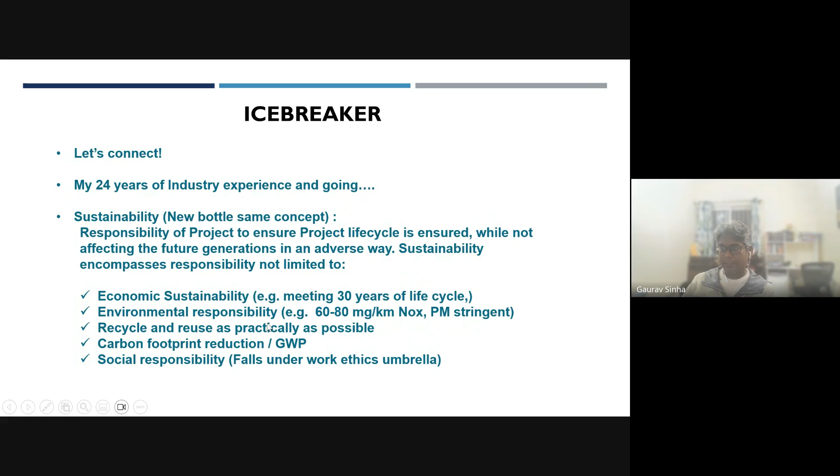Now, what is energy security? Energy security means having a primary energy supply from domestic and external sources, reliability of energy infrastructure, and the ability of energy providers to meet current and future demand. So what we want first is to secure the sources of energy.

Then energy equity - this means from the poorest to the richest person, everyone should be able to afford it. A country should be able to meet energy equity so that everyone can afford energy.

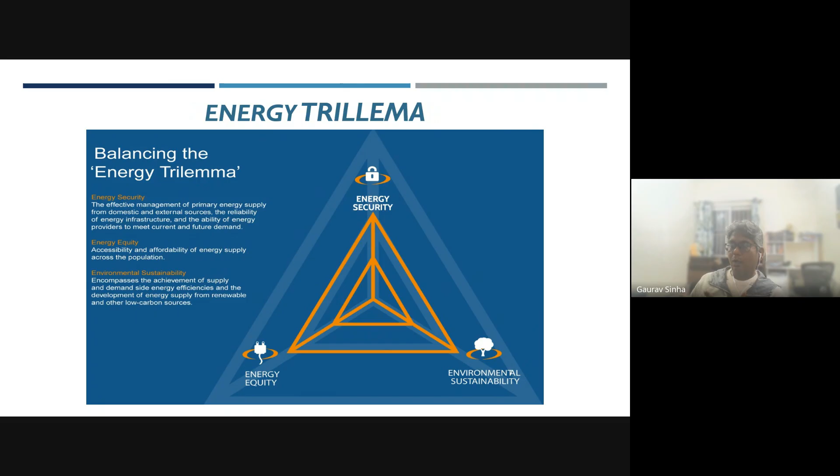Energy equity, again, this is where we are kind of struggling. Not everyone can afford it. A person who comes from an urban background and a relatively good economic background is able to afford air conditioning in his house. The other guy, even if he puts up an air conditioner on a continuous basis, the budget and the bill is going to kill him. I'm just giving an example. So it's not equity. Energy equity is still a long way to go.

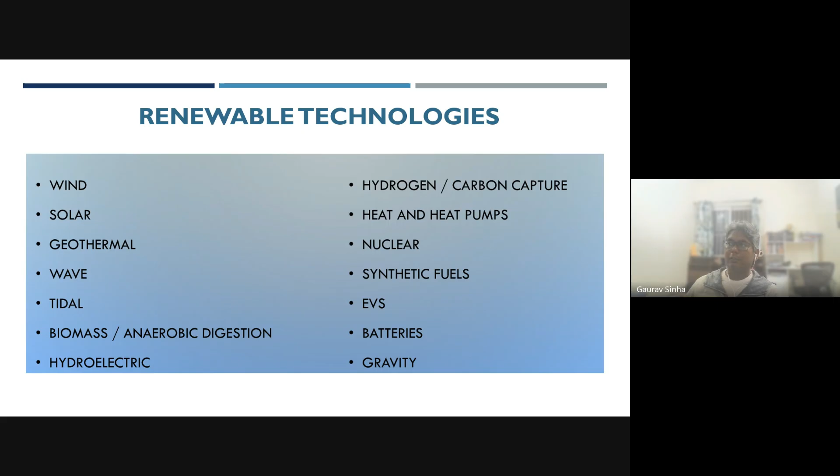EVs, yes, we are going for many electric vehicles. If you see today on the roads, we have Tata cars and other brands too. They always talk about green board cars, they are there. Hydrogen batteries, yes, there are certain projects in place. We are getting there, but it has a long way to go, and I'll come to the reason why. Hydrogen was a big thing, it still is a big thing, just that the technological breakthrough is ongoing. Gravity, I won't call this of much consequence.

Environmental concerns: now, whenever we talk about wind technology, we think it is excellent. But first of all, India does not have a sustainable wind farm kind of environment. Even if you go onshore or offshore, not everywhere can you get consistent wind. It is most sustainable in places across the world where wind technologies or wind farms have been in place, somewhere in Sweden and basically the northern side of Europe.

And then there are certain wind farms which have been made. The largest wind farms are in China, in a desert. Interestingly, the China one is not currently being used. They have made it, it's there, it's lying there, not currently used. It is capable of more than 3000 megawatts, but it is not being used because they're still on coal as of today, so they are technology ready. At one point, for example, in our televisions, there used to be something called HD ready or Android ready. So these countries are currently technologically ready, but since they have got a cheaper source of energy, this is still a long way to go.

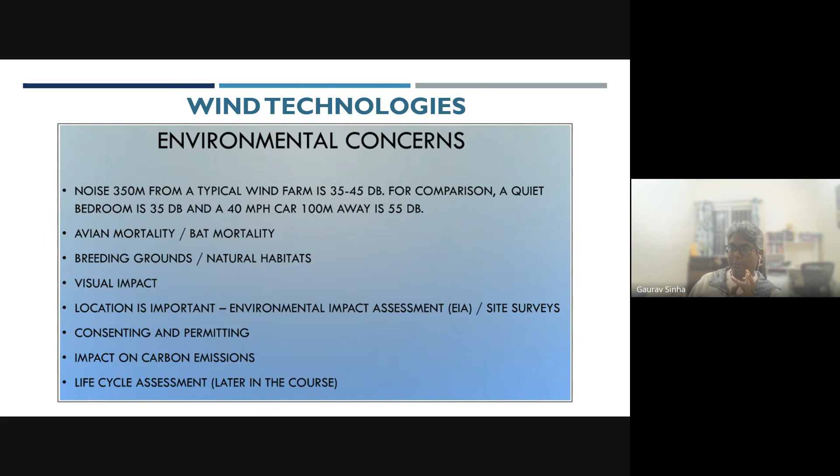Now, wind technology has certain other concerns. These terminologies are more taken on a universal level. So we have PETA, they have avian mortality, bat mortality. If the habitat of birds is there, the breeding grounds are affected. Visual impact is there too. I won't go into these points, I'll just go to the consenting and permitting. We need consenting and permitting issues, we have carbon emissions, we have life cycle assessment. So that is all, we have a lot to consider.

Shifting to renewables is not something I have been directly involved in the industry, but I'll try to touch upon this subject briefly. It's still important to discuss and compare with the oil and gas industry and what it is doing. So my subject will move from renewables to what we are doing today in the industry.

So hydrogen cells, wind, solar farms, water waves - these are some of the key renewable sources. Today in many small villages, the government is giving subsidies and incentives to go for solar lights and everything like that.

There are a lot of incentives by government for producing these. Wind is still a long way to go. Hydrogen cells, long way to go, but it's coming. Water and waves, we are lesser involved in that one.

Wind technology challenges: if the wind is to give a certain power, there is a minimum wind speed required. The typical threshold is something like 12 meters per second wind velocity, then we can think about generating a decent amount of power. If the same wind speed drops from 12 all the way to 7...

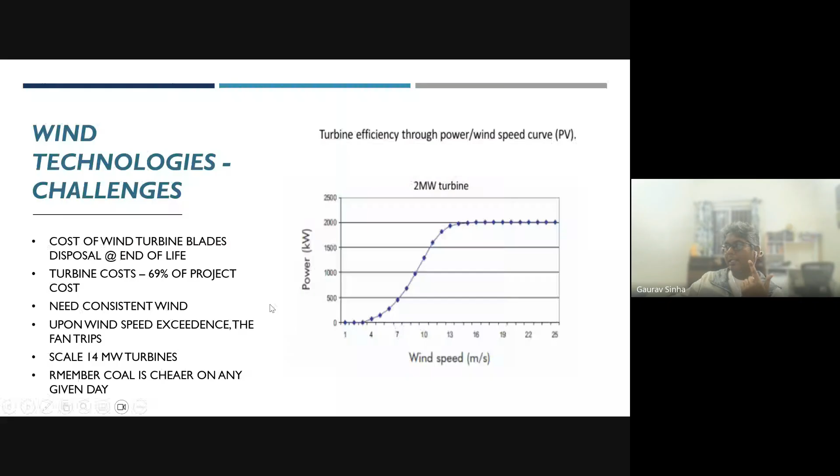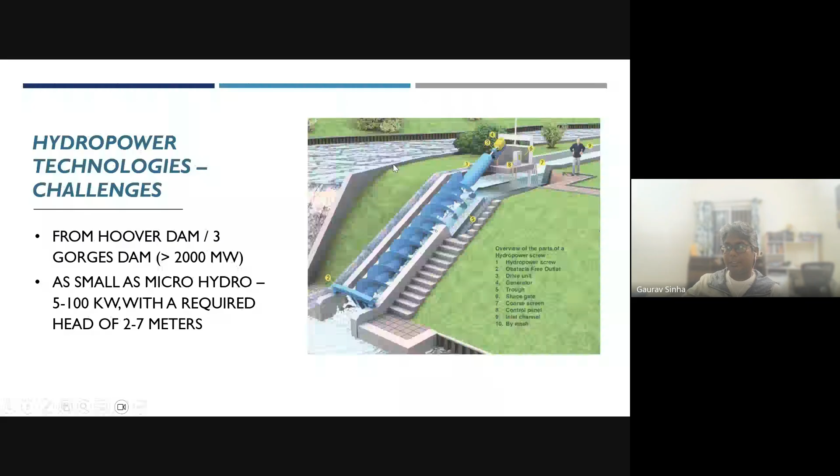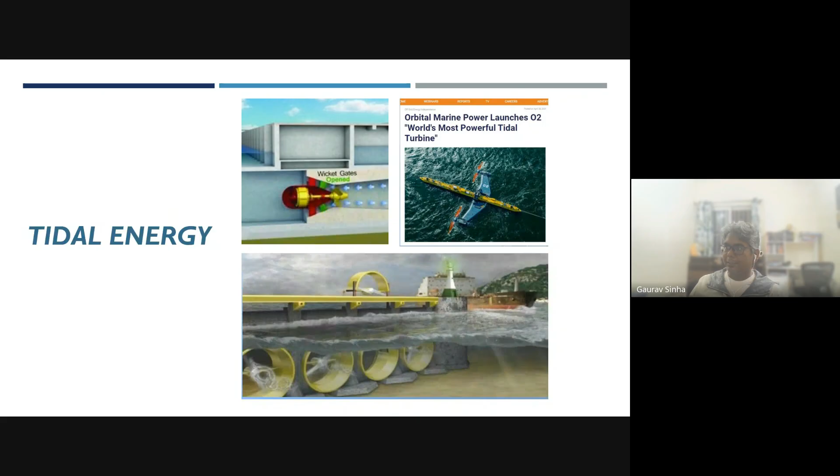See, even if the water source should be there, then you get this issue. So I wanted to mention hydropower technology as one option. Tidal energy is still there, mostly outside India - I'm not sure if it's happening in India, please let me know if you do. But it is happening elsewhere. Okay, I would like to mention one more thing.

In India, the concept is very interesting. We apply carbon taxes for compliance markets only. Compliance markets means those industries the government has already identified as pollution-causing. So they said that they either have to have an adjacent renewable industry, and the renewable gives them some carbon credits to offset the so-called carbon taxes. But even now it is very minimal as of today.

By 2030, that may go up. Again, it depends on how the government takes up these taxes, but it can go as high as $70 to $90 per ton for compliance markets - not every industry, just compliance markets. So carbon credits will continue. Carbon credits - you cannot necessarily only buy from your own company. If there is a third party renewable company, they can sell you carbon credits, and you can buy from that third party to offset these taxes. So this is going to be a very interesting scenario going forward in 2030.

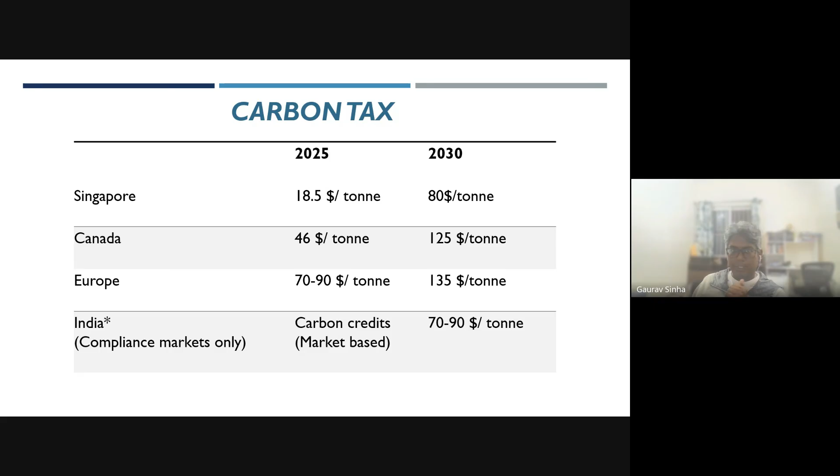I'll move from these somewhat boring topics, but I would like to emphasize this is still important for us. This terminology, global warming potential - I don't know if you see this word nowadays or not. Imagine if carbon dioxide causes an effect of making the earth warmer by 1 degree, we call this potential - the global warming potential of carbon dioxide is 1.

Compared to carbon dioxide, methane has 28 times more global warming potential. So if you are emitting 1 kg of carbon dioxide versus methane - I'll give you an example of where methane comes from. Methane may come from, for example, an LNG plant. In the LNG plant, one of the last units is called the nitrogen rejection unit, where they reject the nitrogen present in the final LNG product. There is a nitrogen recovery column, and from that column they send out the nitrogen.

But along with the nitrogen, 4% of methane is sent out directly to the atmosphere. So imagine that 4% of methane is as dangerous as 28 times the carbon dioxide global warming potential. I won't give you the exact definition, but you can imagine. So the carbon dioxide to methane ratio is 28. The only silver lining in this entire thing is that methane is not released as frequently, or as much, from vehicles and other places, as carbon dioxide is. So carbon dioxide is the single largest emitter by economy of scale. But then we have methane.

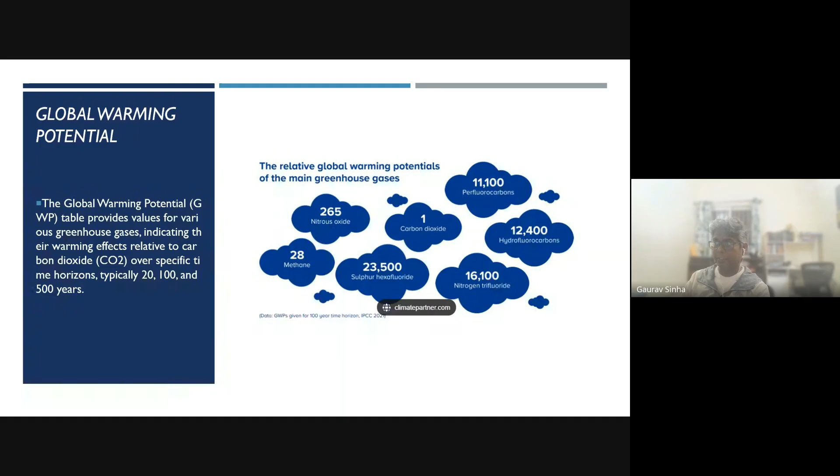Types of hydrogen - you have heard of green hydrogen, I'm sure. What is the definition of green hydrogen? Green hydrogen is developed from renewable energy. So imagine you're using hydroelectric power, which is a renewable source of energy, or even a wind farm, and using that power into the electrolyzer to produce hydrogen - then it is green hydrogen.

Gray hydrogen is something produced from natural gas or methane, using PSA, pressure swing adsorption technology - that is what we do in refineries today. From natural gas, we go through certain chemical reactions and create hydrogen using the reforming reaction, followed by PSA, pressure swing adsorption. That is called steam reforming. It's all about the source - the source is natural gas, and natural gas is supposed to come from fossil fuels. So that is why it is gray hydrogen.

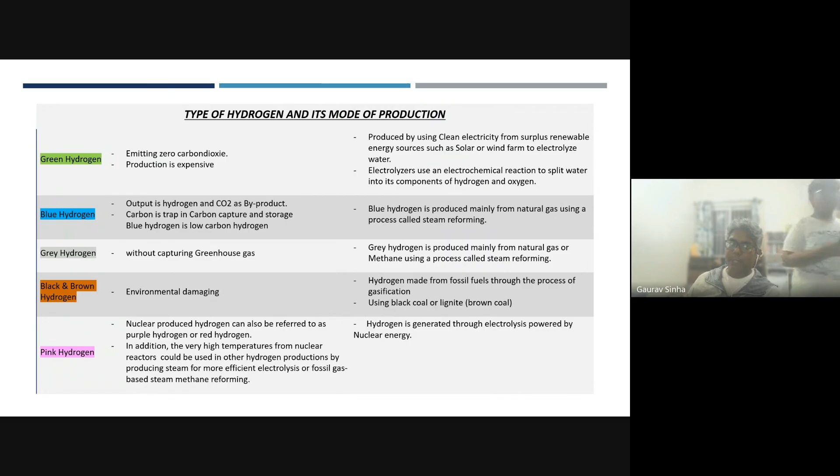Can anyone tell how diesel or biojet can come from a green source? Some of you must know jet A is very common, but in a sustainable way, for biodiesel and biojet, the main feedstock is plant oil and tallow oil. Plant oil is like vegetable oils, and tallow is coming from animal fats. These are the extracts we take directly from plants and oils, or even used cooking oil. That's why we say we are taking from greener sources and not from fossil fuels. Whatever technological change we make to make this source viable is what we call green - so green hydrogen, green diesel, green petrol as end products.

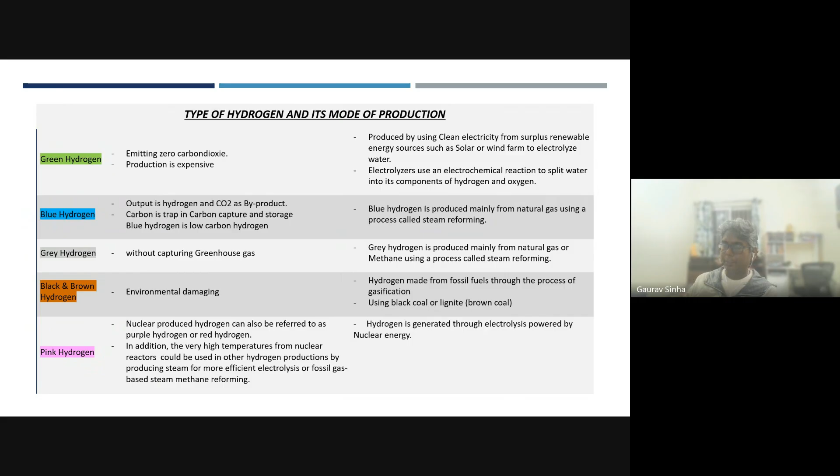I'll quickly move to hydrogen. The biggest problem today, why hydrogen vehicles are still in a concept stage, is because the problem with hydrogen is where do you store it. Compressed gas is a problem, compressed cryo is a problem, liquid hydrogen - how do you put it - or you use an adsorbent way, or interstitial hydrides, complex hydrides, or store it as chemical hydrogen along with ammonia. All these things are there, and sustainability is still halfway. Why halfway? Because if you produce hydrogen from PSA, conventionally from natural gas, the cost of hydrogen production could be as low as $2 per kg.

If you do the same thing with respect to the green sources, then the cost can be as high as $7 to $8 per kg USD. That makes it always economically unviable, and that's the issue.

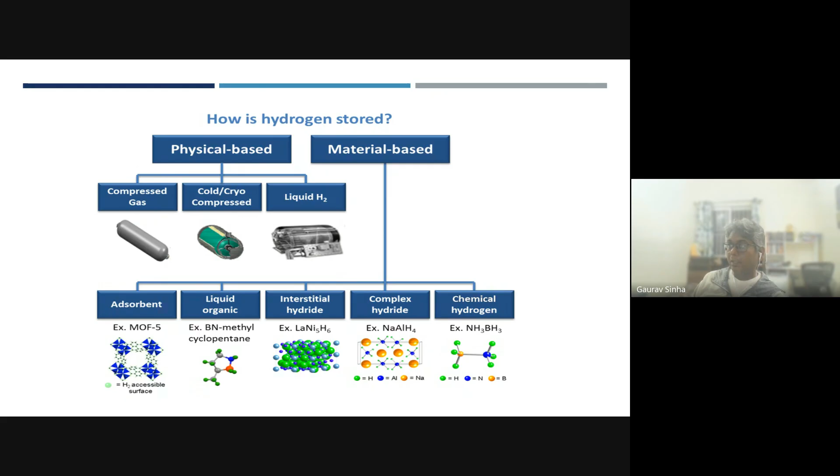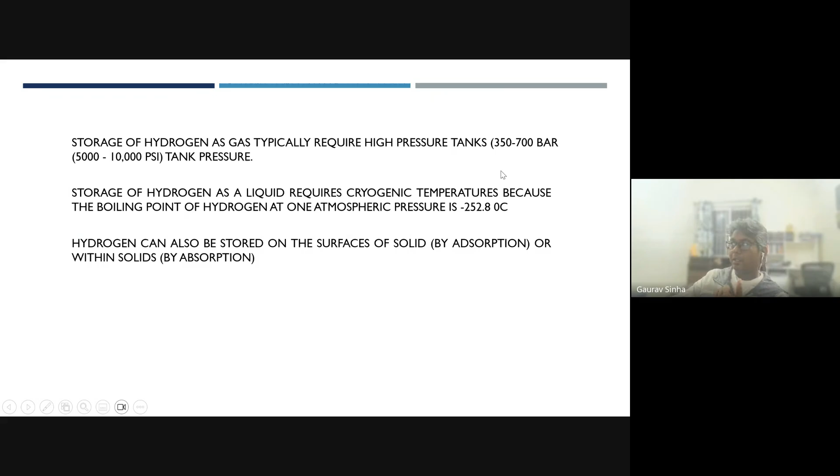Storage of hydrogen requires like 350 to 700 bar. It's a huge pressure. Just to give you a perspective, your tire is around 2.5 bar gauge. So against a tire, you are talking about 350 to 700 bars. Just imagine what kind of thickness the metal will be requiring.

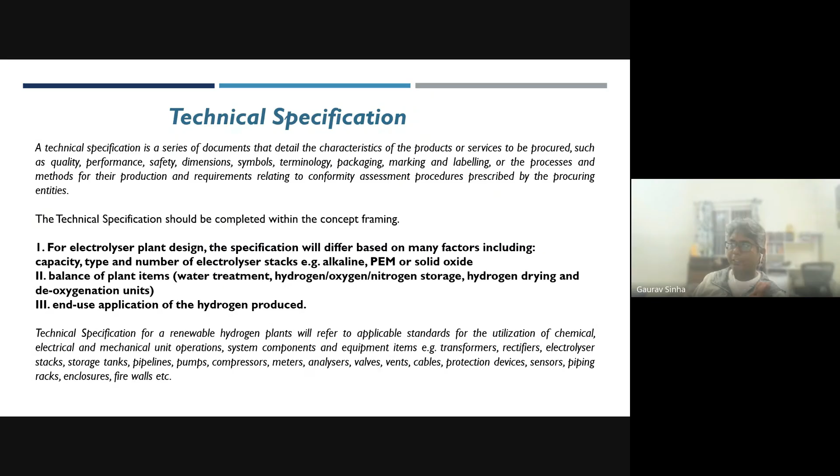I will skip this slide, and this is on hydrogen, basically what is the technical specification. We have to give the technical acceptance criteria required and what type of technology we are using, so we prepare those materials which are the input. Starting input is called a technical specification, whether you are going for alkaline, PEM, or solid oxide. This is true for any industry, we have to first come up with a technical specification.

Gate 2 is the FEED stage. That's the time when they give this information and pass it on to a contractor, a design company, and say give us a cost estimate which is plus minus 20%, for example. Once they come up with a more accurate estimate, they will come up with all the design details, get contracts from vendors, get quotes from vendors, get all the things they can get from vendors. But remember, there is no PO placement, no purchase order yet, no procurement, no buying. Until there, we are still checking the feasibility.

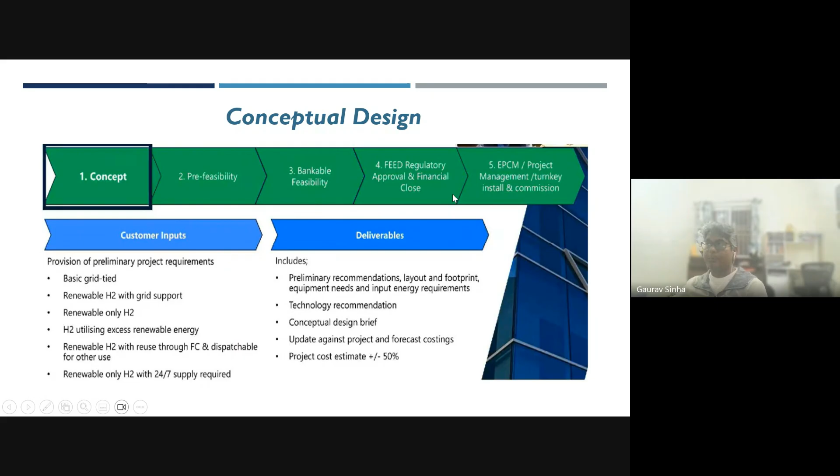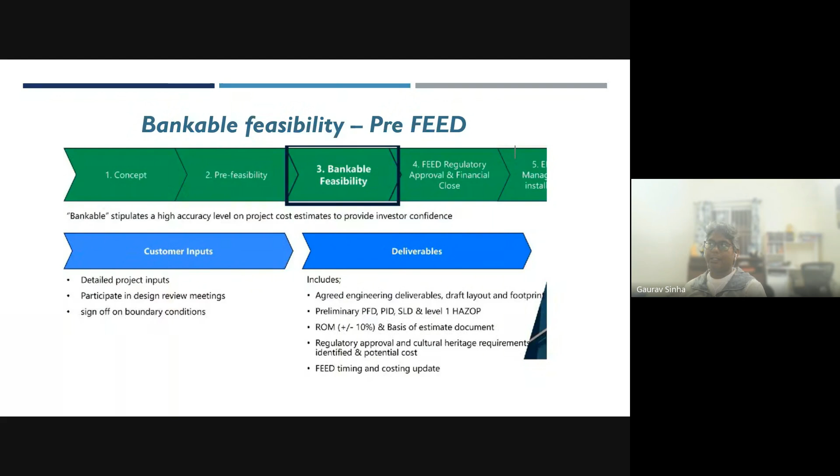Until this point, the second stage being the FEED or front end engineering design, if we have come across that it does not meet requirements, then it does not meet. Once we've gotten a cost as low as plus minus 10%, let's say, until the feed point, then this cost will be given to the client. The client will look at it: do I have the budget? Does it give me enough returns? And if he is happy with his assessment, then the client will say okay, let's go for the project. That's where the final stage, detail engineering, comes into the picture.

Detail engineering means they have given a go ahead, then we are talking where we have all the orders to the vendors for the big equipment, small equipment, piping, whatnot, and eventually it will all end up from detail engineering, meaning the detailed design, from design phase to install and commission. I believe many of you are aware of this process, but I just want to determine it clearly.

Basically, it's very easy to look from a non-industrial background and think we have a great technology, but why is it not getting approved? It's the business case which has to be met, and the business case is justified until stage 4. Until the business case is justified, many of the SAF plants by Shell or other companies, even Exxon, have shelved the project, have stopped the project because it did not justify a viable business case.

So while we always talk about having an energy transition, if the bigger companies say no, it is not making a business case, it will continue to fall back on the old fossil fuels, which is still cheaper. There is a lot of abundant oil and gas in the Gulf, in the US, in Russia, and still a lot to go. So that is why they will always continue to be cheaper.

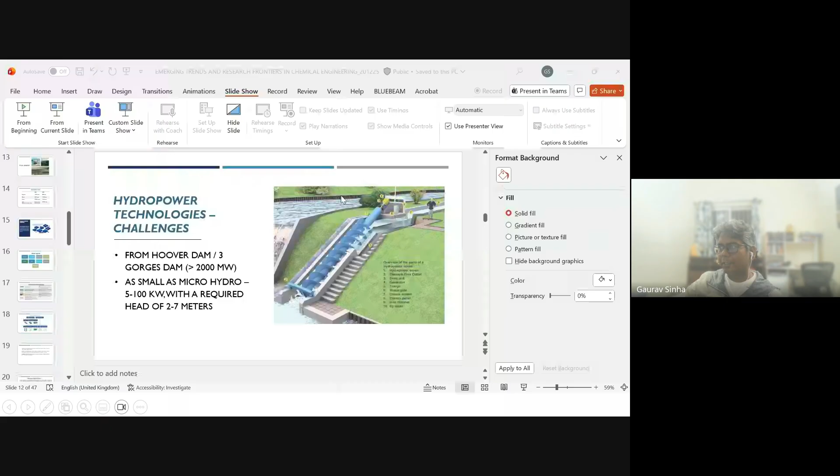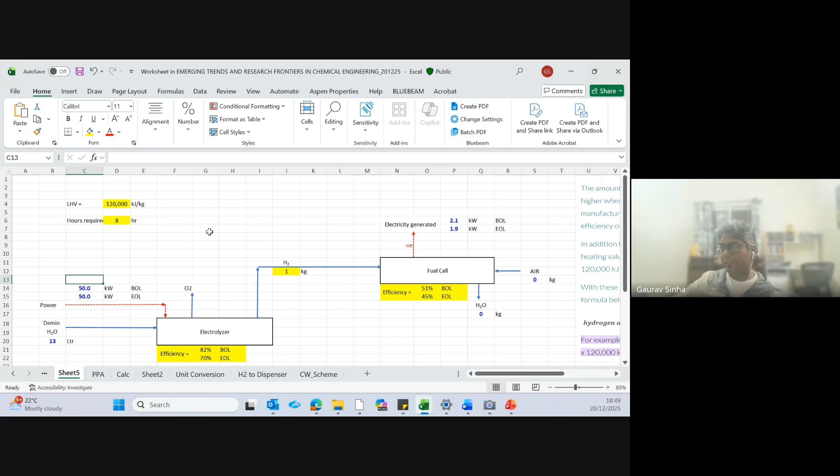We were saying that hydrogen is $2 per kg, that is the cost of making hydrogen. But that is not the end of it. We also want to see, to make 1 kg of hydrogen into the fuel cell, how much water is required. The water required is 13 liters, and how much power are we going to produce from 1 kg of hydrogen? We end up with a fuel cell battery of 2.1 kilowatts.

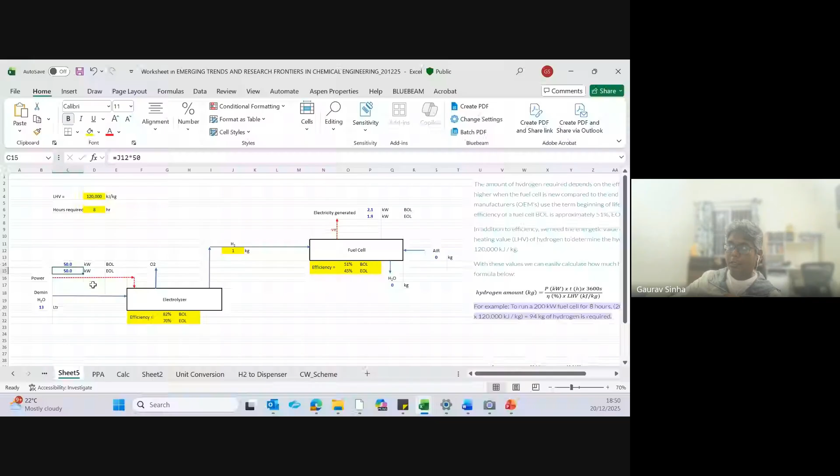But to get to 2.1 and to get this electrolyzer working, imagine we need 50 kilowatts of hydropower or renewable energy. So from 50 kilowatt, we are getting only 1.9 or 2.1 kilowatt of energy stored in the fuel cell. Somebody will say, why are we doing so much? Why not simply continue to use the renewable at 50 kilowatt and let the end user use the 50? Why put so much effort to get a hydrogen fuel cell which can only give me 2.1 kilowatt?

The answer lies in the fact that renewable sources cannot store energy. Even with a flywheel, you can only store it for 15 good minutes. The technology has not developed such that once you are generating on a continuous basis, you have to let go of it, you have to throw it away literally.

So instead of throwing that excess energy, the plan is that if you can have an electrolyzer, a PEM electrolyzer which can make hydrogen, and from there generate a fuel cell, the fuel cell is capable of 2.1 kilowatt. So from 50 kilowatt, you can only achieve 2.1 kilowatt. There is a lot of losses attached along the way, if you see.

Not only that, we need demin water as much as 13 liters for 1 kg corresponding to 2.1 kilowatt. So imagine if I want something like 100 kilowatts, which is 50 times this, I will need 50 times 13 liters in total. It's a very high consumption, so to speak, from a utility perspective.

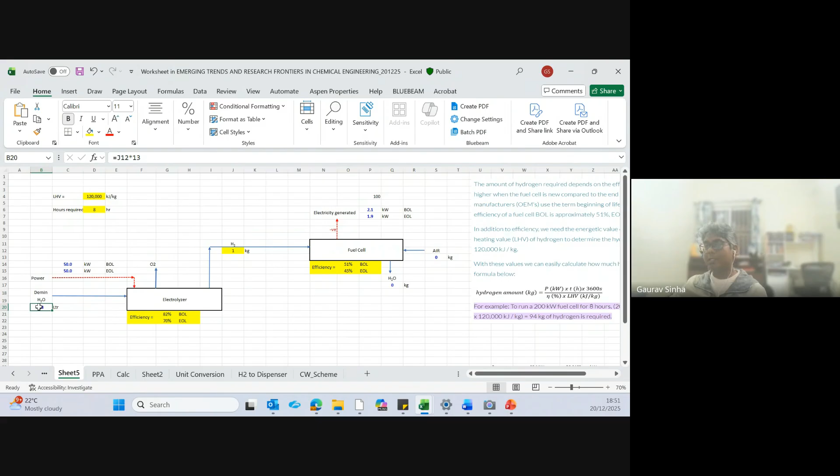There is a lot of utility required, and demin water does not come directly from groundwater. You have to have the demin package, convert the normal water, go through several stages of treatment, and eventually get the 13 liters. So there are a lot of losses involved and a lot of water involved, which is also as precious as this.

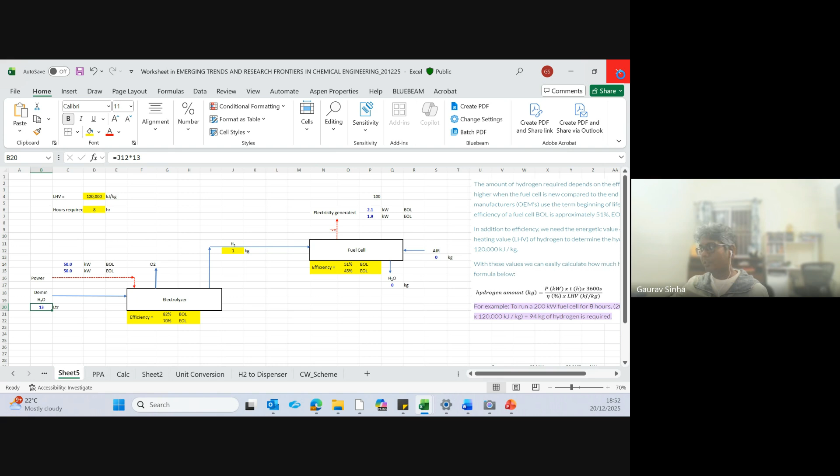So the idea of giving this was that even when we say hydrogen, there is a lot of issue with hydrogen. You cannot simply say I want hydrogen, I like hydrogen, so I'll make one. No, that does not happen.

I would like to touch upon something more closer to what we do on an industry basis. I would like to touch upon 3 topics. Topic number 1 is that everyone understands the fact that we have a lot of power plants, a lot of flare stacks today, continuously emitting gases which contribute to the greenhouse effect. So this is nothing but the carbon capture technology.

What it does is take the flue gas from a stack, via a blower send it to the so-called CCUS system. This is based on similar amine treatment units, where you have a contactor and a regenerator. The contactor comes with a solvent which is going cyclically, with very little solvent loss, just going in a recycle way.

So we are recycling the solvent, making the solvent richer. The solvent is a special solvent, either from Shell or Mitsubishi has got a solvent. The concept is the same.

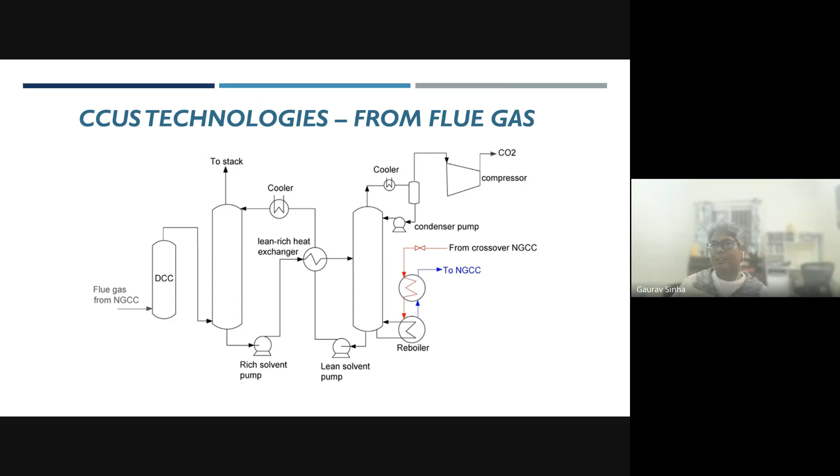So these are the CCUS technologies I was talking about: Shell Cansolv technology, Fluor Econamine technology, Carbon Clean. So all these are licensors, technologists involved today in essentially the same setup, just with their own solvents. Every solvent has some advantages, some disadvantages. Some can handle more SO2-laden flue gas, something can have more of one advantage over another. So they have their own advantages and disadvantages.

The key concept: solvent absorption followed by regeneration. CO2 can be further cooled by mechanical refrigeration and stored in cryo vessels. CO2 removal efficiency is said to be 90%, but I have seen more on the 80% side. Key selection criteria is minimum regeneration energy, which I said is the difficult thing. Advantages against certain contaminants: for example, Cansolv proprietary solvent is resistant to high SO2 concentration, thereby giving better removal of carbon dioxide. This is the second concept.

So just now what we discussed was that there is a flue gas and we remove 80% of CO2. Here's another interesting fact: what we do here is we want zero emissions across offshore platforms and other locations. We don't want even that 20% to be lost. So what do we do out here?

There is a flare gas that is supposed to burn up eventually in the flare stack, which will emit the CO2. Why flare gas? Normally there should not be gases which get flared, but during startup or during upset scenarios, a pressure relief valve pops up due to some emergency. There are situations when you cannot avoid sending some off-spec gas which you cannot utilize and sell, so you have to send it to the flare and burn it. So there is a burner up here.

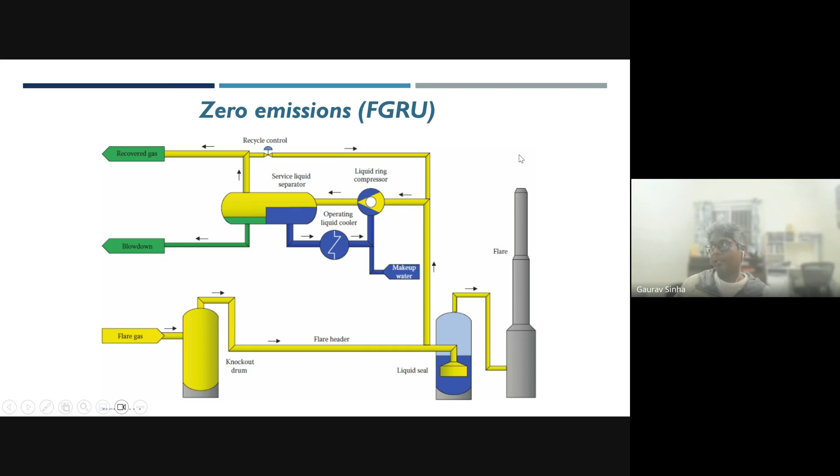Everything comes at a cost. All these compressors and other equipment do come at a cost. They come with indirect emissions, because to operate this compressor you still need energy. To operate certain coolers you still need water, and that water is coming from a cooling water system—that pump also needs energy. So where is that energy coming from? That energy is coming from fossil fuel. They are there, but not as bad as directly emitting into the atmosphere. So this is the FGRU concept.

So I actually wanted to touch upon FGRU, CCUS, and the third one is SAF and renewable diesel. This is something I spoke about a couple of minutes back. The idea is that if there is an existing refinery, what is the feedstock to any refinery? It is crude oil.

Now, with today's economics, crude oil is getting less and less—sorry, many of the refineries are closing down, they're mothballed. So instead of using crude oil, we can actually use palm oil. We can have a pre-treatment unit, because unlike crude oil, palm oil and tallow cannot be straight away used. They have to go through something called HCO, or hydro cleaning system, or a pre-treatment unit, to take care of gummy substances and remove heavy metals which are there. They remove all those things to be able to send it to the actual processing unit, which is HEFA.

HEFA is nothing but hydroprocessed esters and fatty acids unit. It is similar to hydrotreater units, hydro desulfurization units, and hydro isomerization units. Basically, by doing this, with all the separations like a refinery, similar kind of fuels and utilities, we eventually get renewable diesel, sustainable aviation fuel, and naphtha as the final products.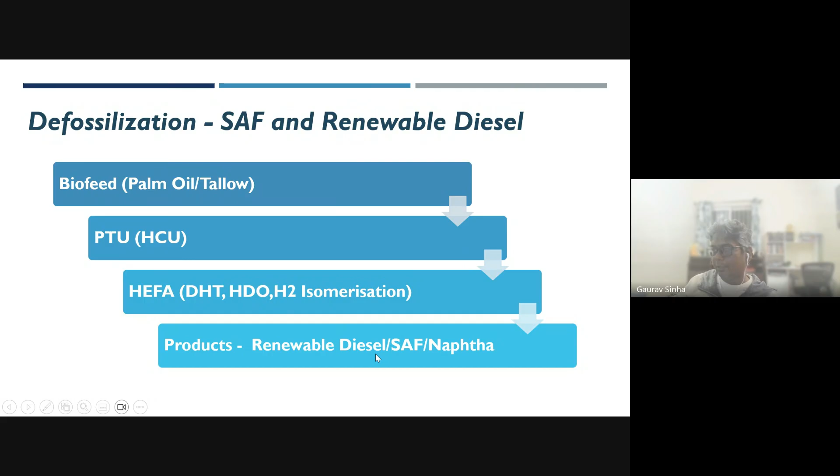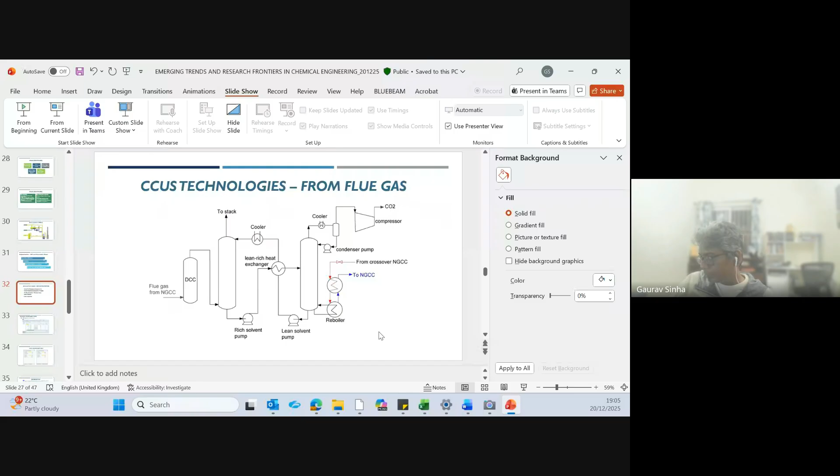Okay, I'll come quickly to something called simulation, for which I was also given as a topic. I wanted to come to the simulation topic again, going for a time check. Okay, still good.

So simulation, right? I'm sure many of the younger engineers and the younger generation have used this concept, simulation. You may have HYSYS in your college curriculum, and many people might be better than me at it. But the thing is, what is the use of simulation? What do we do in simulation in the process industry? How is it important to us?

So simulation, what it does is it has got certain fluid packages which can help you determine the properties, generate properties, and simulate whatever you have put in the technology. Whatever plant you're putting up, it can simulate the entire plant as if it will be working, as designed, it is supposed to work.

It will kind of simulate that, and you can validate it if there is an existing plant model, an actual running plant, you can model the same, be it chemical reaction, be it anything. So basically you can simulate it, optimize the plant, validate the plant, and debottleneck the plant with this.

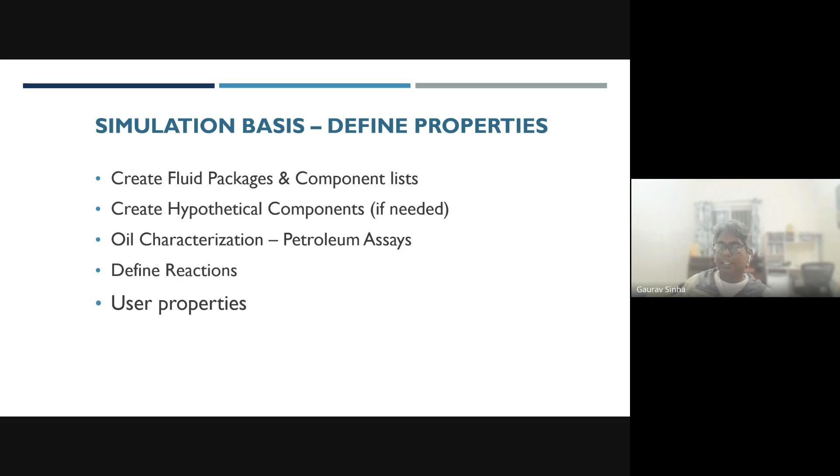And if there are any reactions, we can define reactions. If we want to generate user properties like density, viscosity, vapor pressure, thermal conductivity, specific heat, or any other data needed on a day-to-day basis, these properties can be well generated. So this is typically for HYSYS.

This is not the only software we use, it's pretty common, so I'm just sharing this. But PetroSim is also very similar, Pro/II is also very similar. So we come up with components, we have methane, ethane, isobutane, and so on. We add the components, then we define...

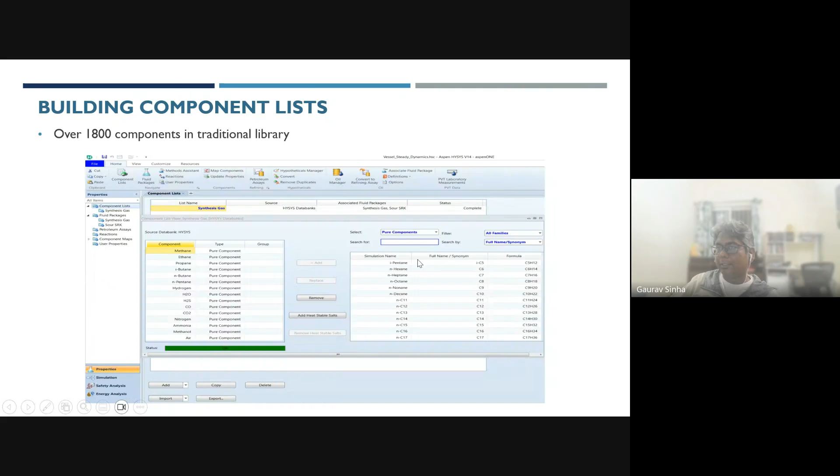So then we define the hypo components. Hypo components are sometimes what the client gives, not everything comes as a proper composition. So they call it hypo, like pseudo components. Pseudo components are like if somebody has already modeled it previously in HYSYS or something, then the properties we have from that previous model, we only get the molecular weight and normal boiling point, and then we allow it to back-estimate the hypo, or the pseudo, or whatever you can call it.

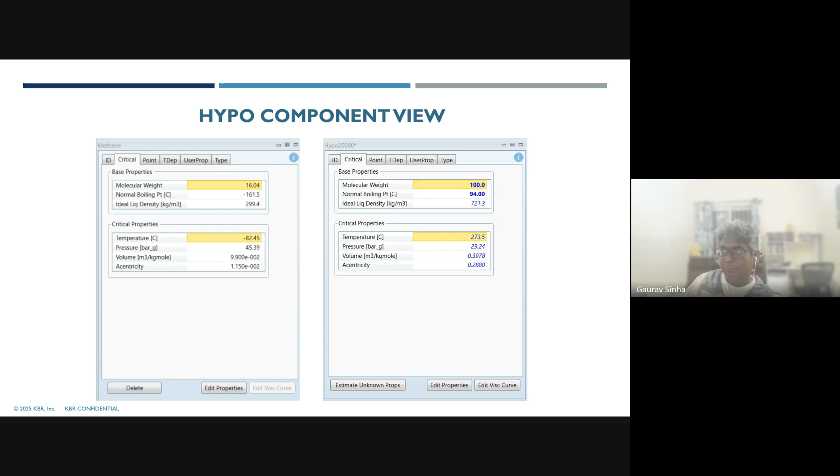So we have a list which comprises of lighters, actual components, hypo, and the TBP. We can use in any combination, whatever is available with us. If we have got lighters, then only lighters. If you have got all the actual components, then actual components. If we have got all the hypo, you can also use purely based on hypo. Or you have got the crude assay, then you can put in the crude assay and the software will generate the properties, or a combination of three. You can also put in the input or feedstock conditions. So once we have given all that, you see there are a lot of property packages.

For example, PR is pretty common. If there is hydrogen, there is a hydrogen package. If there is SRK, then there is an SRK package for certain kinds of components. Lee-Kesler, then there are certain which use Antoine's constants, more applicable for some electrolytes. So there are various packages which can be used, and there is a guideline on which package to use.

For hydrocarbons, like I said, we typically use PR. Then if it's sour service with more H2S, we use SRK. So then we can also put in the reactions.

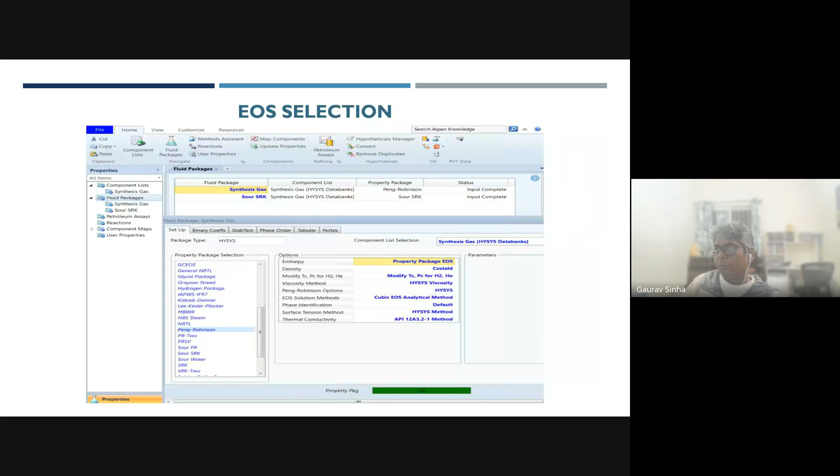Reactions with the stoichiometric coefficients can all be well defined here. We can have conversion, equilibrium, heterogeneous, catalytic, kinetic, simple rate. I know I might be going a bit fast, but these are all the facilities available - nothing great. What I'm saying, you don't need to know now; when you learn, you will learn. But what I'm trying to say is that we have a component, we have the equation of state to be selected, then we have all the facility - reactor, line sizing, exchanger, you name it, it's there.

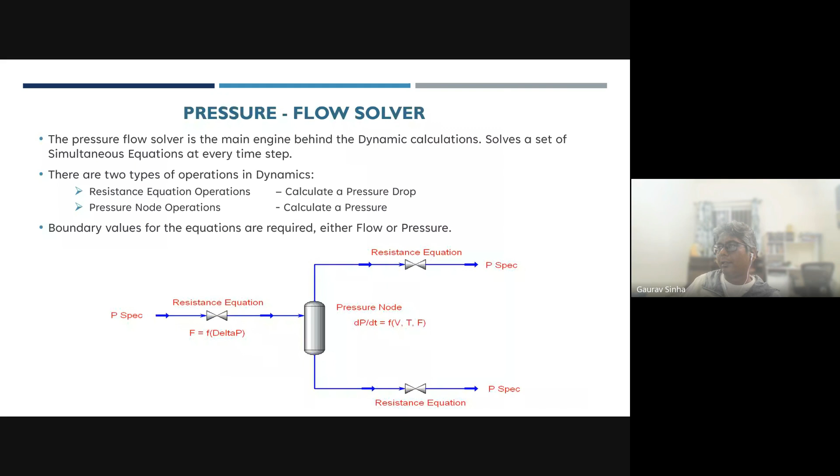So I will kind of skip the dynamic simulation, but I'll try to make it simple - what can simulation do for us in oil and gas? If nothing else, simulation can help in line sizing, whether a 2-inch or 3-inch line size is required. But line sizing can also be done using an Excel spreadsheet or flow assurance data.

Then there is control valve sizing - if there is a control valve in the line, again Excel can do it. Separator 3-phase sizing, yes, Excel can do it. Distillation column - this can also be done separately using Excel, or with proprietary distillation column software.

Either spreadsheets or by the simulation. What does it do for us? You can include a control valve, put a PID controller - all three things can be put here. If there's a line sizing, you can put the pumps, there's a pipe, then a separator, then distillation column, followed by heat exchanger including reboiler, reflux - everything can be there, and there are a lot of functionalities inside that.

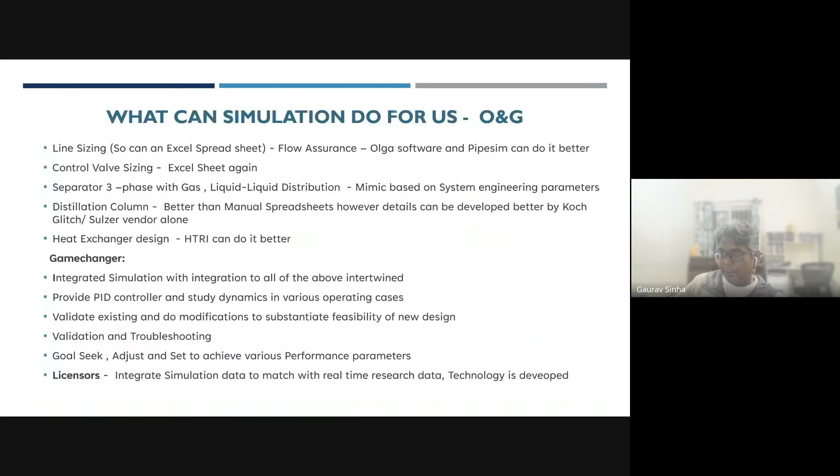But if you go to the next slide, what went wrong is a pump should operate only on liquid phase. If you see here in the first slide, the vapor fraction was 0.8227, meaning you cannot force vapor through a pump in real life. Simulation will agree to it, and it will give you a warning, but you have to be intelligent enough to know the warning. So there was something wrong.

You should not have had a liquid at 30 degrees C. In fact, if you see what all was wrong, the source was having a vapor fraction of 0.8227. Across a pump, there is not supposed to be much temperature increase, but what happened is the temperature shot up from 30 degrees to 139. It's not possible for a temperature to shoot up from 30 to 139 like that.

You know what actually happened in this case? When we developed this, we thought everything is going great. We put up some numbers, and eventually it started considering it as a gas. And gas, if you compress from 1.5 bar to 11.50 bar, it will compress, and based on the efficiency of that compressor, it will increase the temperature to very high numbers. So instead of a pump, it ended up behaving like a compressor. The whole thing is incorrect.

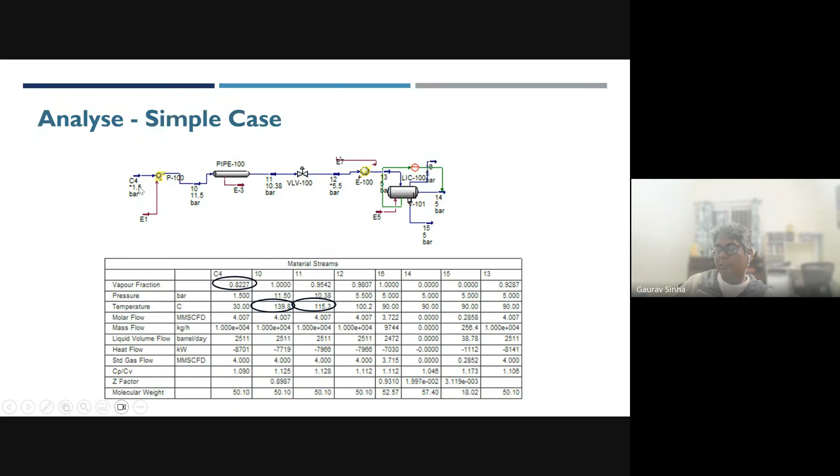So to do it correctly, what we needed to do is realize that the pressure we had specified was below the vapor pressure of butane liquid. Butane has a vapor pressure of 2.86. So what I did is increase the source pressure to 2.87, which is more representative and correct. So you see the vapor fraction is 0, and everything is converging nicely, and we are getting a separation of butane and water.

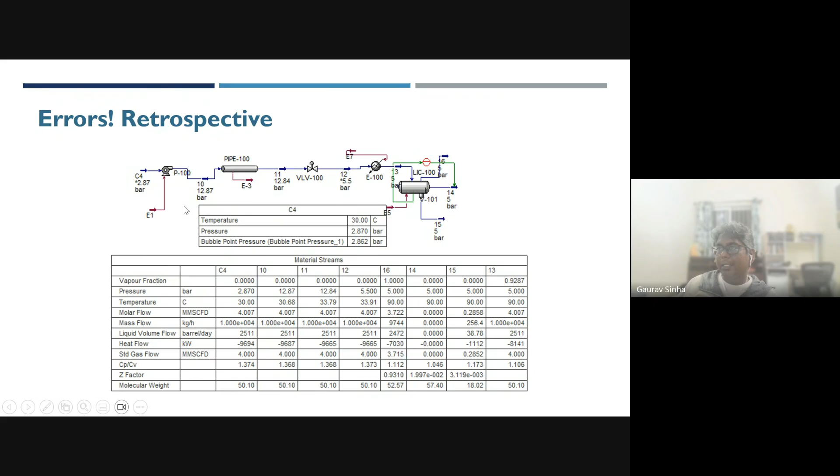And in stream number 13, because the exchanger is increasing the temperature from stream 12 to 13 — if you see stream 12, the temperature is 33, and in 13 it's 90 — because of that, whatever vapor was there changed. Stream 12 was an inlet, a liquid. Stream 13 became two phase, meaning more vapor, very less liquid, and of this, the vapor was eventually separated, liquid was separated, water was separated. So this way we have to be intelligent enough to understand these things.

There are a lot of other things simulation can do. It can do cost estimation, optimization, operator training simulation, digital twin, Aspen Unified PIMS, which is production planning software. This means you can define that if the price of petrol is going lower and you want to convert your refinery to produce more petrochemicals or naphtha, this PIMS software helps you plan the production and distribute the streams in a way that gives you the maximum commercial benefit. So there are no limits, and with AI in the picture, this is even going to be a game changer.

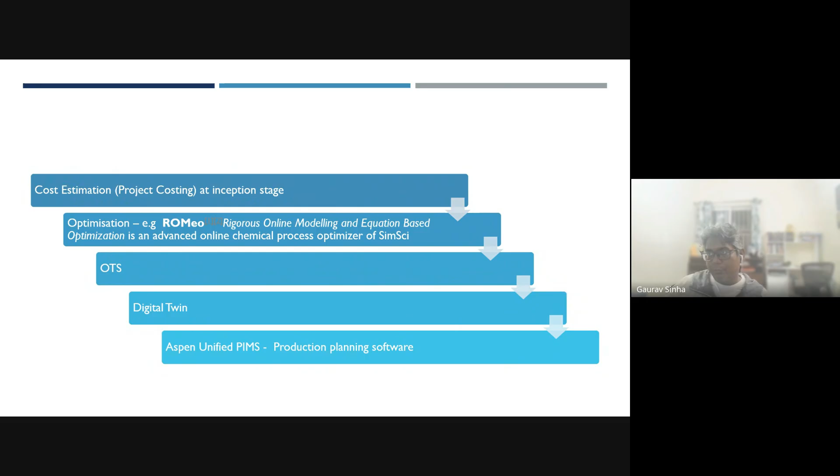So I will stop here. I had kept something for reserve slides, but that is not required for now.

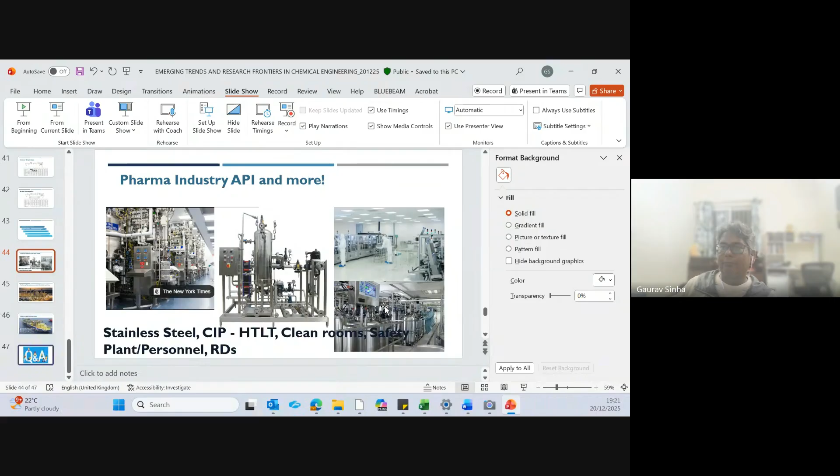But what is special about an FPSO, or what is different about an FPSO from a refinery? The biggest difference is that the FPSO, a ship which is taking oil from all the wells, sits at a single location. For the next 15 years it will be sitting in a single location, it will never ever move. It just takes from the wells, processes it, and passes the oil to the nearest tanker. The tanker will come every 15 days, take it away, and that will go to the shore, to a refinery like Jamnagar refinery, and so on.

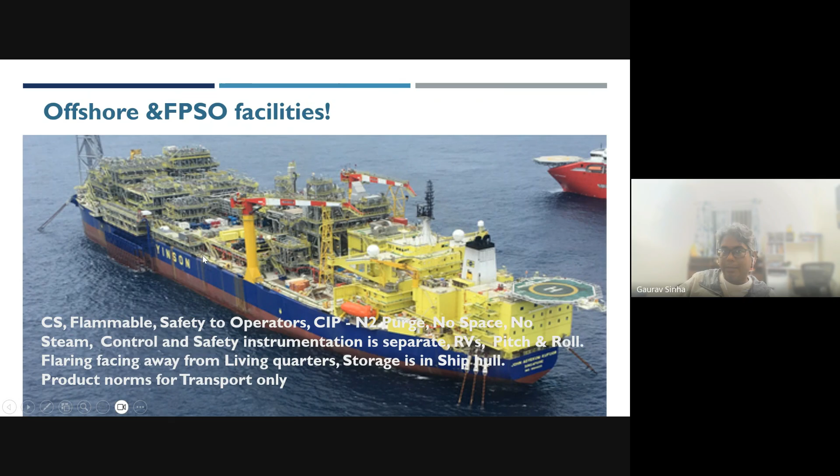How people stay in the FPSOs, how they operate, how they do their day-to-day work is pretty interesting. I would compare offshore straight away with a pharmaceutical plant. What difference do you see in a pharmaceutical plant? Everything is stainless steel, everything is very shiny, meaning it cannot afford to contaminate.

Tomorrow you are going to eat a medicine, paracetamol. Do you want it contaminated? It has to be extremely clean. The air has to be clean, people have to be clean. The system has to be designed for good CIP, cleaning in place. HTLT means high temperature, low time. So after every use, after every batch, it has to be cleaned with steam and with ultra pure water, not just normal water, not just RO water, ultra pure water. So steam is not just any steam, it is ultra pure steam, or clean steam.

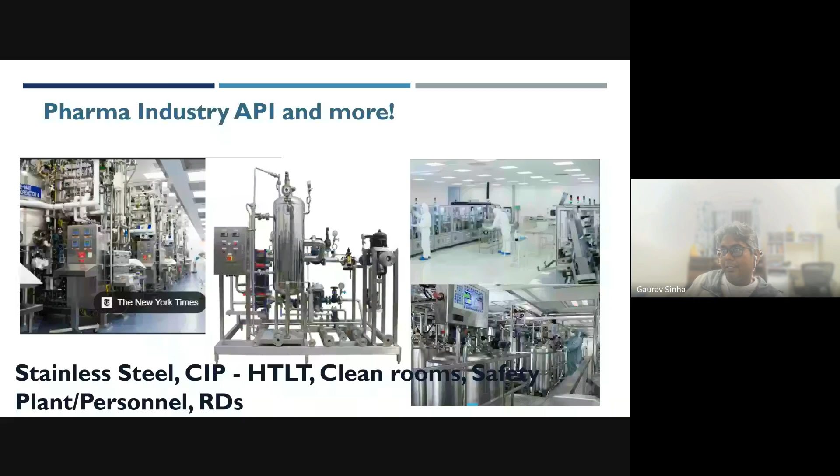Clean rooms, safety personnel, and the air - we don't want external air, so the rooms are slightly pressurized. The air in the room is at slight pressure, so if anything happens, it goes from inside to outside. Nothing comes in, dirt will not come into the system. These are things very much prevalent in our industry. And refineries, as you all know, lie in between those two.

So basically a refinery has a lot of space. Flammability is a problem, so people handling flammable gases and H2S-laden gases have to wear a lot of PPE, personal protective equipment, sometimes masks, sometimes other things. It's a safety concern for somebody to work in, but at the same time they have to deliver, they have to meet production goals. So they have to have enough control and safety instrumentation in place to make sure all this works.

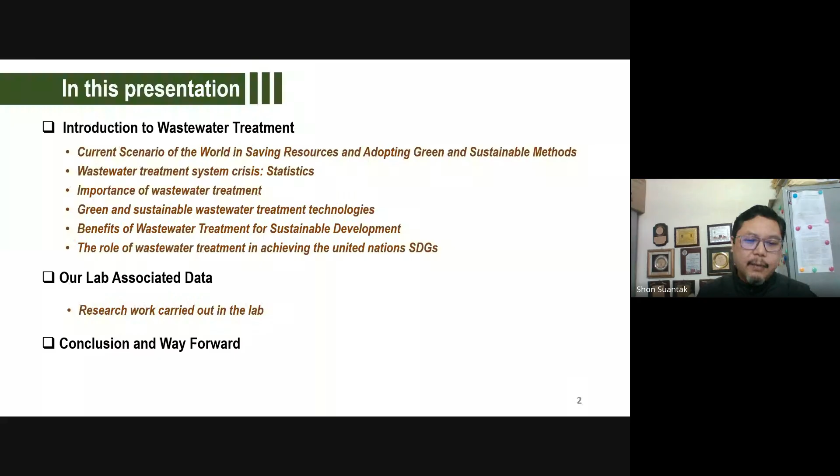For sustainable development, we can also talk about SDG - Sustainable Development Goals - and what those goals are. Then we're going to move on to our lab and what kind of research we are doing this year at MNNIT - that's what we're going to talk about.

First thing first, many of you know that wastewater can be categorized as domestic, industrial, agriculture, and stormwater. The basic thing is that this wastewater could be started from our household. If we can treat and maintain the waste from our households, we can save so much and give a positive impact to the environment.

This is what I was pondering - rather than using different technologies and investing so much money, why can't we concentrate on our households? Then we could save lots of money as well as lots of resources.

When we talk about waste, it is more about the contaminants - the pollutants that are in the water. So how to remove these things is very, very crucial.

We have a traditional approach and a modern approach. In the traditional approach, earlier what happened is we mostly focused on purification before discharge into surface water - in industry, effluent treatment, we concentrated on that, and on public health, so it should not have an impact on the environment.

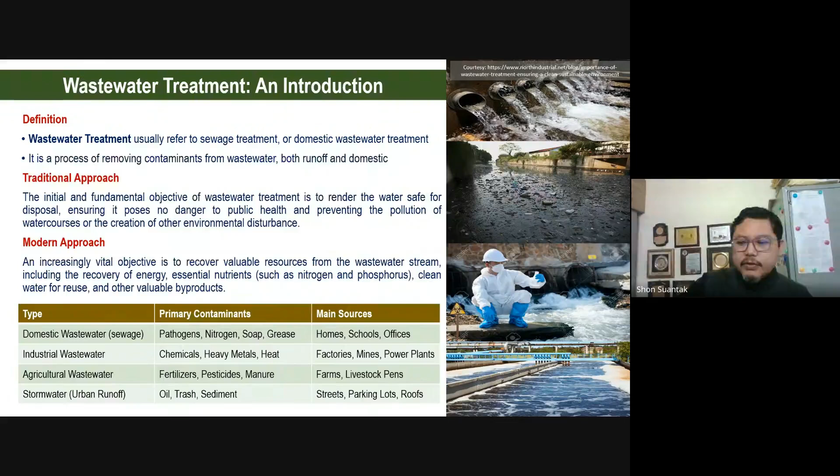In a basic sense, I'd like to brush you up that in wastewater treatment there are certain stages - primary, secondary, tertiary, and before that, preliminary. Here in treatment, whether advanced or conventional traditional treatment, these are the primary things we learn in schools and colleges - what is primary treatment, secondary, tertiary.

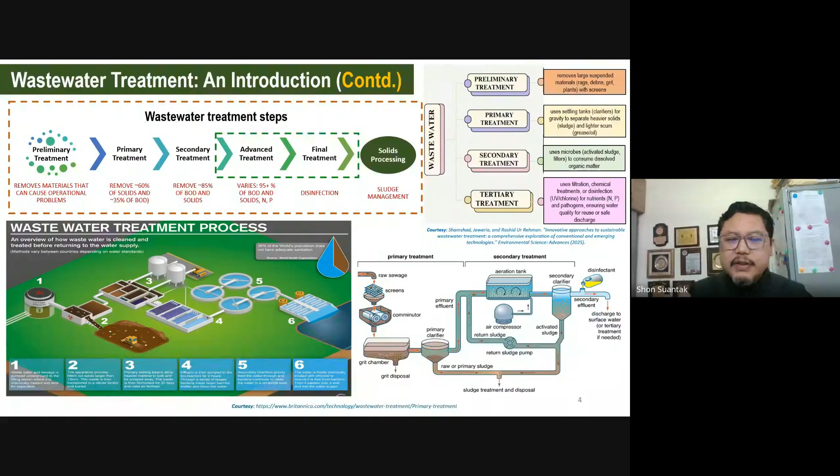Now we are a little bit advanced - we are using different types of technology. Most researchers are focusing on advanced treatment - that's what we're going to talk about.

As we see the worldwide scenario, we can see how many countries are adopting green and sustainable methods. If you see, there are 4 categories.

The first one I just make it in the green color. That is what we call more concerned about sustainable and green technology. They could achieve not 100%, but nearly 100%, like countries such as Sweden, Norway, and Japan. So they are more focused on greenery and this type of sustainability.

But India comes under the third category. I consider it as an orange color. So India, Russia and others are still in progress. Due to urbanization and industrialization, we're still facing high pollution of rivers and groundwater. But the government is taking lots of initiatives like Namami Ganga, and I'm also part of it, so we're trying hard.

Actually, the pollution control board is also trying hard. Like in the Kanpur area in UP, there are so many effluents, some from tannery, textile industries. So they are installing online monitoring systems there.

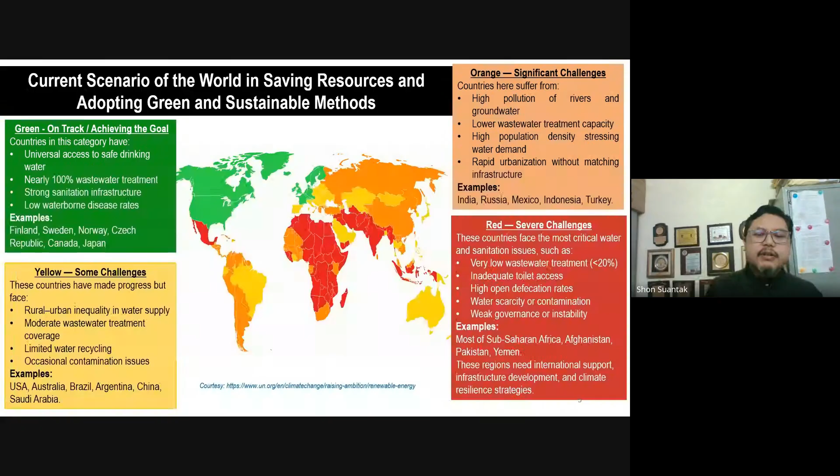In these statistical and qualitative studies, you can see the color coding. If you look at these metrics, you can easily identify which country or continent did the best and what we need to improve.

Based on this NITI Aayog report 2023, which I found very interesting - if you see these statistics, sewage generation is almost 72,000 MLD, while installed capacity is around 31,000. So there's a huge gap, around 60%.

So what could be the reasons? Untreated sewage water is around 41,000 MLD. Most researchers talk about underutilization of existing STPs due to incomplete sewer connectivity and maintenance challenges. These are concerns that we, the citizens of India, should think about. If you look at metro cities like Delhi, Mumbai, Bangalore, they generate about 40% of total sewage.

So it's high time that after seeing these graphical representations, we recognize how much gap and improvement is needed in class 1 cities. That's why wastewater treatment is very critical in these places, and we need to focus on it.

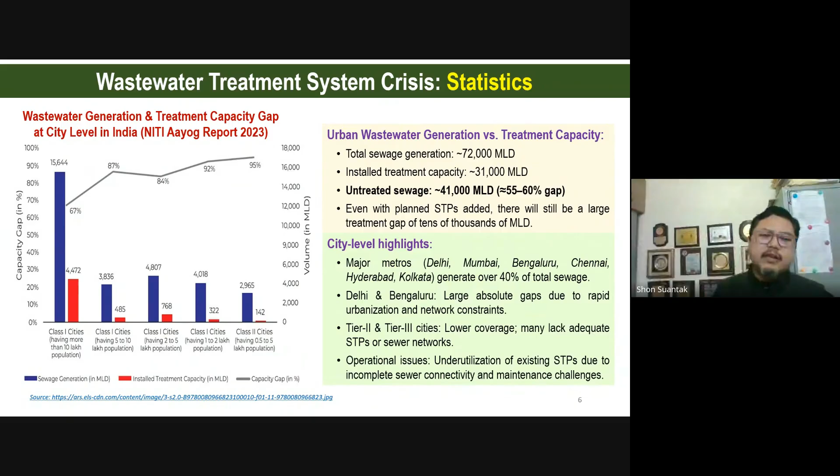In the next slide, we can see the importance of wastewater treatment and why it is very much needed. As we know, protection of public health matters—drinking water is one of our main sources of living. So we need pure and safe drinking water; if we cannot treat it properly, it will impact not only our health but also our ecosystems and environment.

Wastewater treatment is important for urban and industrial growth—of course it is very, very important. It also helps achieve sustainable development goals.

When we talk about green and sustainable methods, it means minimal utilization of our natural resources—water, energy, land, and raw materials—and generating as little pollution as possible: low waste production, reduced emissions. These come under green and sustainable methods.

We have to evaluate ourselves on whether we are really implementing this kind of sustainable method. This is very important and safe for the human ecosystem. Economic viability also matters, and it supports long-term environmental balance, which requires circular economy principles.

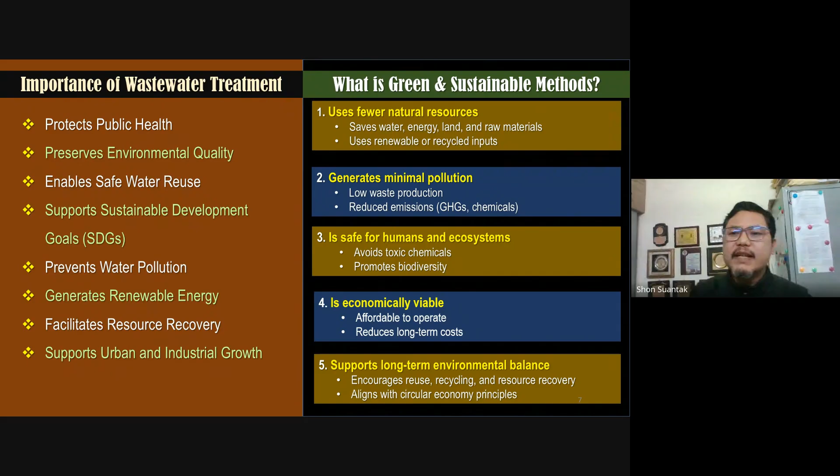I was talking about different types of R's like reuse, recycle, and recover—meaning recovery of energy, recovery of nutrients. All these things impact the process in the long term, so we need a sustainable and green method for wastewater treatment.

I want to highlight different types of technologies people are implementing nowadays, country-wise. I'll give you some examples to give an idea of how people are working on it and what kind of projects have been implemented.

For example, source separation. In Sweden, they came up with a very crucial project—I find it very interesting, and we could implement it in India too. I don't know the feasibility, but as we know, urine contains 80% of nitrogen and 50% of phosphorus.

So in the commode, they designed it in such a way that the solid and liquid waste are separated—the solid waste goes one way and the liquid waste is moved separately so that they can generate useful products.

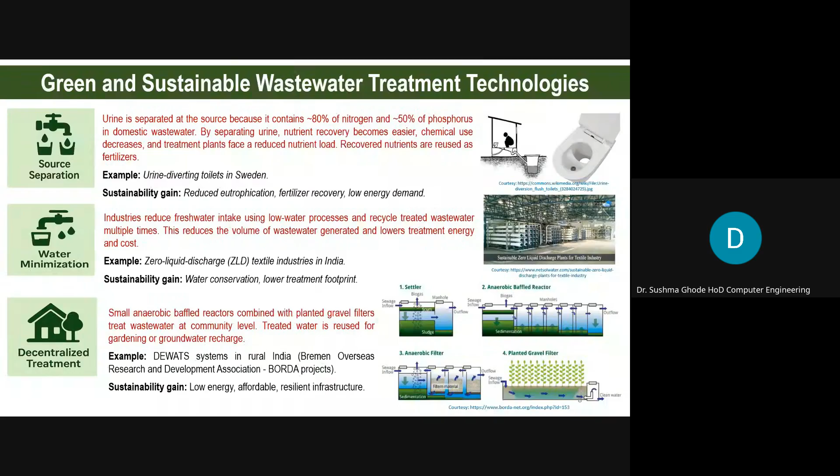By separating solid and liquid waste, we can generate important nutrients from the liquid—nitrogen, phosphorus, and more—which can be utilized for urea and fertilizer industries. This kind of fertilizer recovery has low energy demands. This simple, sustainable wastewater treatment needs to be implemented in our country as well—it was successfully implemented there.

If some of you travel abroad to Western countries, you may see how people recycle their domestic water, and it can be used for potable purposes. The first time I went to Europe, I was a little reluctant to drink that recycled water. But we need to inculcate this kind of culture so that India can grow too, addressing water scarcity through sustainability. If we're not implementing or inculcating this, there's a bit of a gap—we need to think in that way.

Another interesting example: in textile industries in Kanpur, they are implementing zero liquid discharge. What is zero liquid discharge? Some industries have very high water consumption—sometimes around 100 million gallons per day.

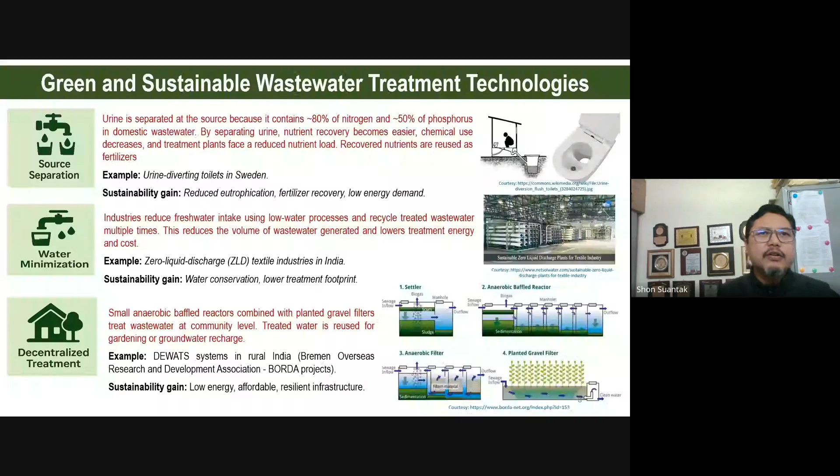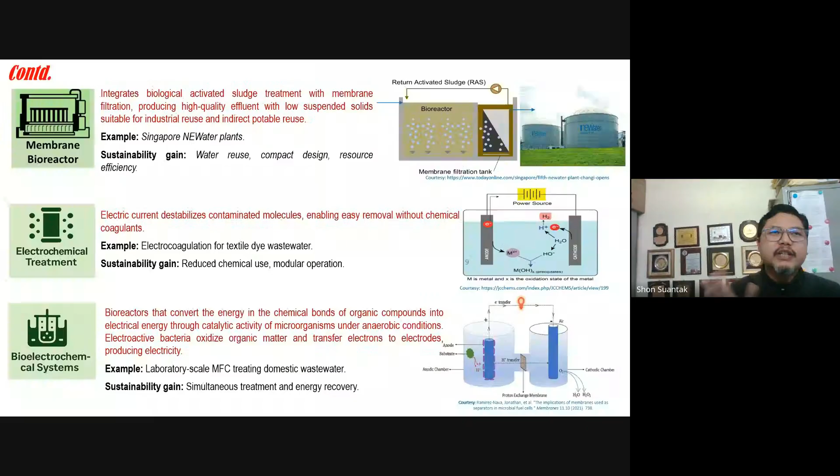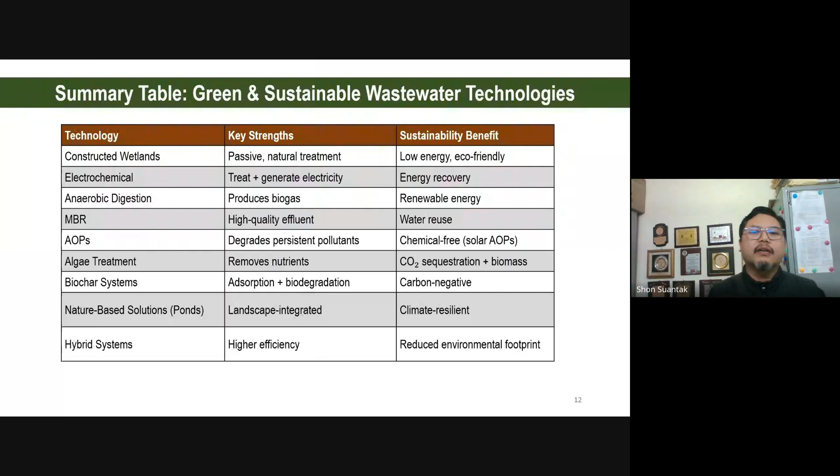Not only will it impact the environment, but once the environment is good, as I said earlier, everything is connected: environment, safety, and health. If the system is not safe, it will impact the environment, then it will impact health. So safety, health, and environment are very important. If water is not safe, it impacts the environment as well as health.

Safety, water access, employment generation, cost saving, economic growth, all these things are essential, so we should focus on sustainable development.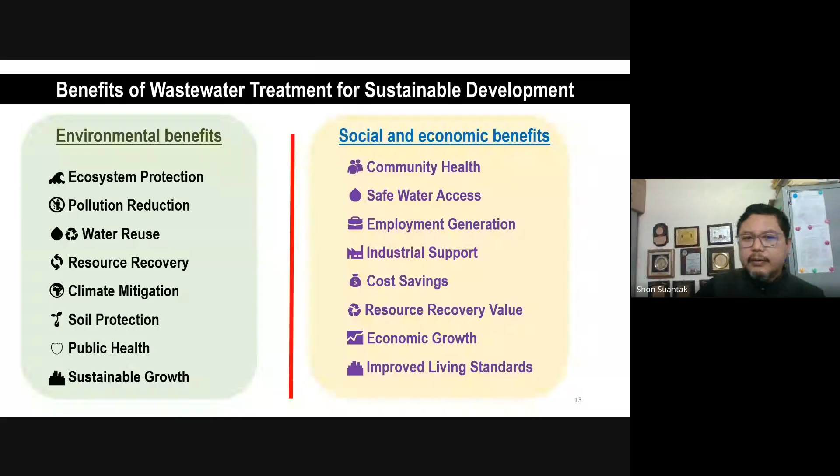What are these SDGs? SDG stands for Sustainable Development Goals, and there are certain categories. The components include clean water and sanitation, good health and well-being, sustainable cities and communities, responsible consumption and production, climate action, affordable and clean energy, industry, innovation, and infrastructure.

SDGs focus on a holistic approach, about how to live in an environmentally friendly culture and world. This is about our well-being, so it is very important.

Each of us should think about what we can contribute, not just researchers alone, but in the house, in urban and rural areas, everywhere, cleanliness and wastewater treatment, we should have the mentality that everyone is involved so we can fight for sustainability. Not only wastewater, but also air pollution and solid waste, collectively this is very important, we need to focus on it.

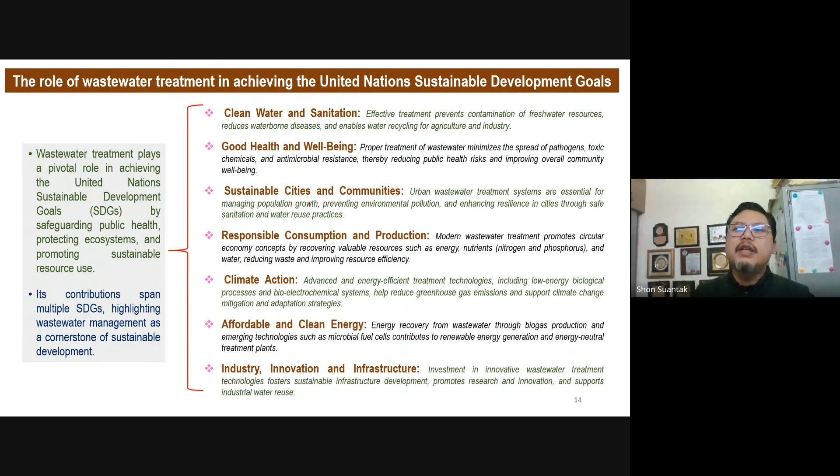We need to have this culture where wastewater treatment is not the only focus. We need to focus on how energy can be recovered, and how we can implement things in such a way that we reduce wastage of water and improve conservation. These go hand in hand. As I said in the starting of this presentation, wastewater starts from our household only. How much water you have wasted, how much you have polluted. So if every household reduces this, it will have a very important impact.

Now I would like to take you on a journey to our lab, to see the sustainability and the greenery. Now you have an overview about the ideas in general. But what exactly happens in our lab, what kind of technology we use and what kind of research we are doing, I want to highlight so it's easier to understand. It's not just about bluffing or saying things; if you can see the work we are doing, it gives more impact, and shows what more efficient things we can do in our own lab. I know most of you are researchers, so I hope you can correlate with me.

There was a project completed in 2022. We proposed an electrochemical membrane bioreactor for treatment of municipal wastewater with simultaneous generation of bioelectricity. The concept is more about MFC, which we talked about earlier. We published 4 papers in this project, 2 patents were granted, and we reached technology readiness level 4. It was well received.

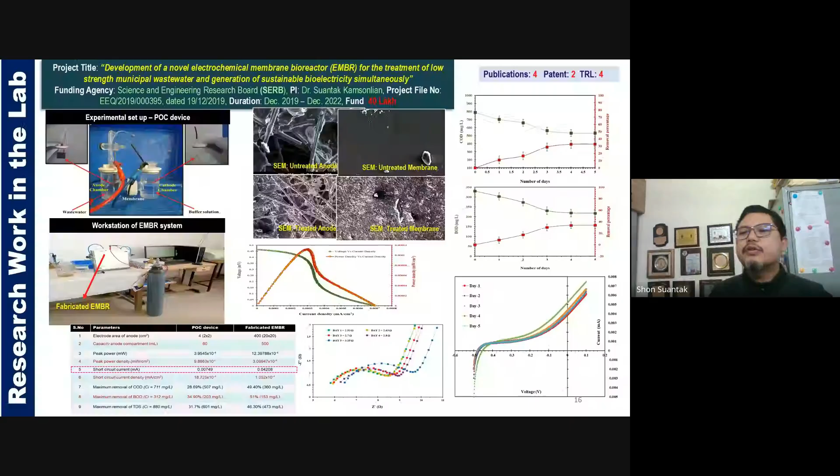In this reactor, we could remove COD as well as BOD. It's not extremely effective, but it could still reduce 40 to 50% of BOD and COD, so it's quite impressive.

The next thing is we are working on contaminated water - simulated wastewater designed like textile industry, and also tannery industries. So dye removal, decolorization of dye using nanoparticles derived from leaves and similar sources - it's more of an adsorption process.

Here, impressively, we could remove around 80 to 85% of the dye, achieving good decolorization. But the initial concentration we worked with is quite low, around 100 ppm. The challenging part is what improvement we can achieve at higher concentrations - whether we have to modify the structure of the adsorbent, whether we have to immobilize or impregnate it. These are the questions we are working on right now.

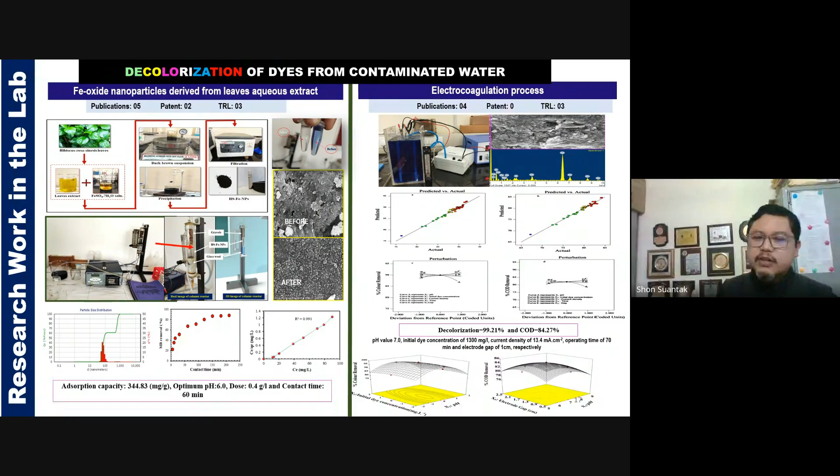Electrocoagulation is also very effective, but the issue is that it consumes energy - the more energy you consume, the more purification you can get. So this is another challenging part.

We are also working on arsenic. As we know, arsenic is one of the reputed, shortlisted hazardous elements - it comes number one. We are interested in removing these heavy metals, and we also try for others like zinc, copper, and chromium. Arsenic is very crucial - if you talk about West Bengal or Bihar, the arsenic impact is there.

Some of the samples we have collected, and we are using our technology to see how we can remove arsenic. The impressive results we got using bioabsorbents like agriculture waste and kitchen waste, which we collected and processed in our lab, show around 70-80% arsenic removal. We cannot expect very high removal like 90%, 80%, or 99% with this method. If we use technologies like electrocoagulation, we could get much higher efficiency, but here we achieved impressive removal.

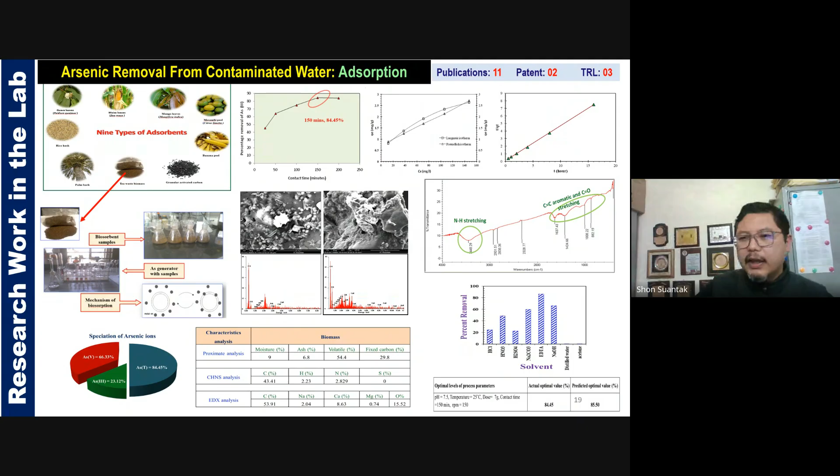Moreover, we tried immobilization of bacteria that could enhance the removal capacity. We have published a few papers and filed patents, two of which were granted. We also conducted a coagulation process.

Impressively, using ferric chloride and copper sulfate, we found that arsenic for drinking purposes in India is allowed up to below 50 ppb, but the World Health Organization says it should be below 10 ppb. We could achieve this after around 60 operating minutes using our ferric chloride process.

You may wonder what the initial concentrations were. The initial concentration for arsenic we took was very low, 1 milligram, 1 ppm.

For this project I collected a sample from Meghalaya, which borders Bangladesh. When I approached the pollution control board, they said there was no arsenic problem there. But I went to the Jaintia Hills because they have coal mines, and I collected samples which came around 500 ppb. Based on that, we worked on real water as well as simulated wastewater, and we got very good, impressive results.

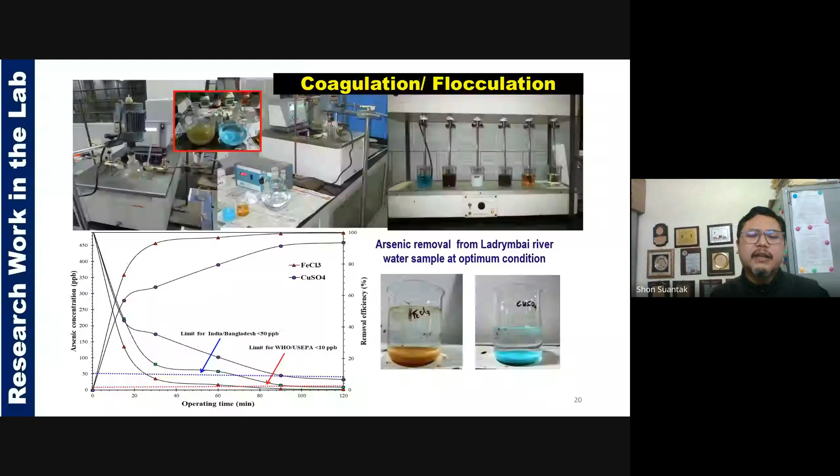Then we used electrocoagulation, and we could remove 99% of the arsenic. The question is whether this is efficient, since we're using electricity. After optimizations, we could receive 99% removal.

These are some of the characterizations we carried out. The electrode we used is the iron electrode. We could have used other electrodes, but our research explored alternates like iron, copper, and aluminum. We found that iron is very efficient for this.

The perturbation curve shows that pH plays a very vital role. So this is our result.

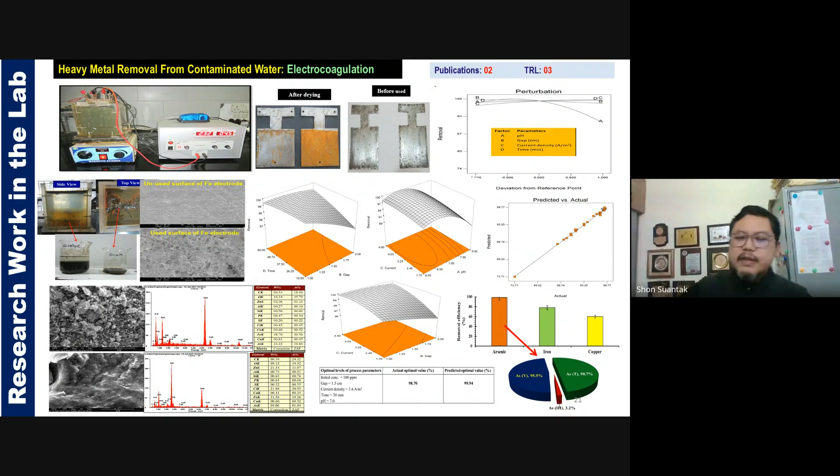Moreover, we worked on plants as well. Many of you may think this is a phytoremediation study, but exactly, this is not phytoremediation—it is a toxicity test. Why did we choose wheat plants?

If you see areas like Bihar and Punjab, they are wheat belt areas, while northeast India and West Bengal are rice belt areas. In the wheat belt area, I read an article that in Punjab, arsenic contamination was found in the wheat grain. That triggered me to start working on hydroponics.

In the hydroponics culture, we germinated seeds and placed them in hydroponics. The wheat was grown and always compared with the control. Physical analysis was carried out along with microscopic imaging comparing control and contaminated samples, showing how things are distorted when contaminated with arsenic.

Not only in hydroponics, but we also worked with plants in flower pots, planting different crops such as palak, spinach, and others. After 2-3 months, we found impressive results. Physically, the control carrot looks very healthy, while the one exposed to arsenic contamination is very thin. This kind of study we have carried out.

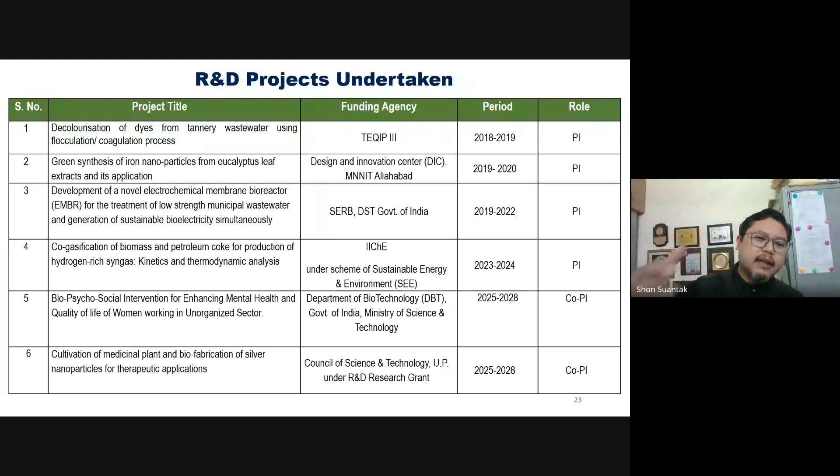These are some of the projects we are working on. Some are already undertaken, and right now a few more projects are yet to come. I'm giving you some ideas so that if you're interested, in future we can collaborate and work together.

These are some of our consultancy work, like Pollution Control Board Delhi. Usually we go to collect a sample and analyze it - mostly with tannery and textile industries.

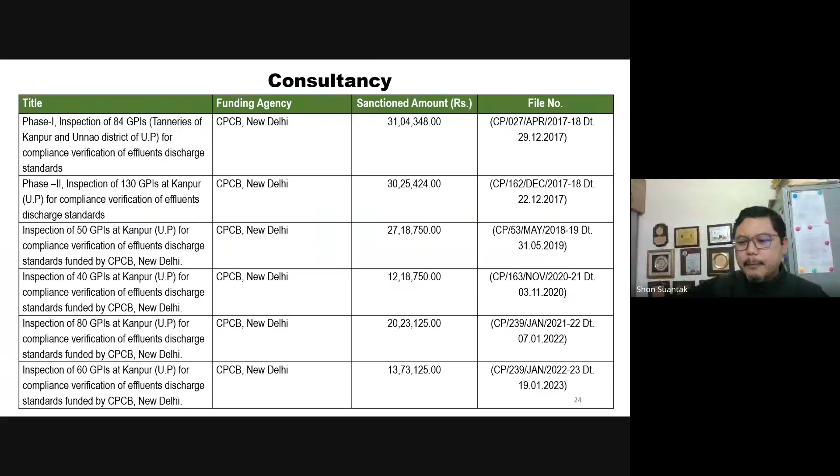Before concluding, I want to say there are many controversial, skeptical thoughts - is it really feasible or not, this technology and all? That's why people are working hard on technology advancement research, and we expect it can deliver more efficient and cost-effective solutions.

So as a way forward, this is not the end, this is just in progress. Sustainable wastewater treatment is already in practice, but research is still going on and in progress, to ensure healthy and sustainable work.

The most important thing I want to highlight is collaboration and knowledge sharing. That's what we're discussing right now too. Of course I can learn from you, you can learn from me - institutions and organizations should have this understanding, so we can work together and promote global sustainable development in the field of wastewater treatment, by 2047, hoping Viksit Bharat will be 100%.

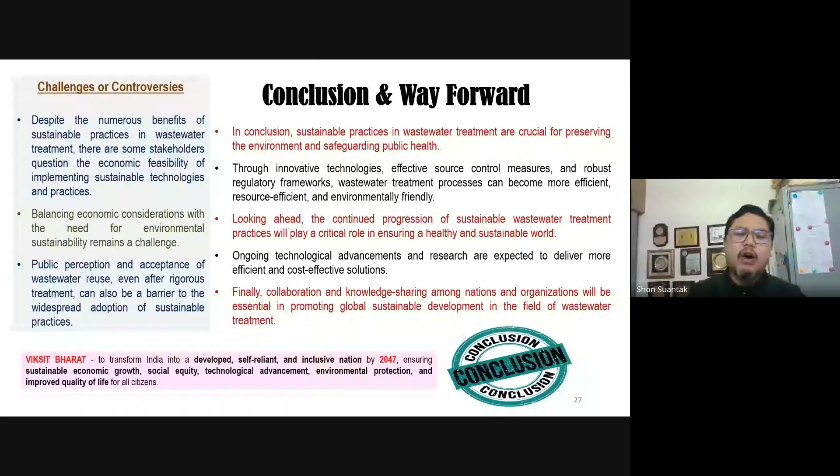Lastly, as one of my idols, Dr. APJ Abdul Kalam said, great teachers emanate knowledge, passion and compassion. Whatever you know, whatever you have, please share it with others - it will be resourceful for other people. You may think you are nothing, but it will be helpful for somebody. Whatever we have, we should propagate and share with others. This is how we grow together.

With this note, I want to wind up my presentation. I don't know whether you have received it or not.

Hello, ma'am. Yes sir, thank you sir. Whether I bore you or not? No sir, it is a very informative session.

Participants, if you have any query, you can ask now. Sir, am I audible? Yes Anand sir. Sir, I just seen that you have worked on arsenic removal and color removal by the process of adsorption and electrocoagulation. Yes sir. How do you see these techniques to be commercialized?

Because whatever the work you have represented is, I think, on a lab scale, getting good results like 80 to 90% removal of these contaminants, like arsenic or color removal. So how do you see this research work in terms of commercialization, or what kind of problems we can face on that?